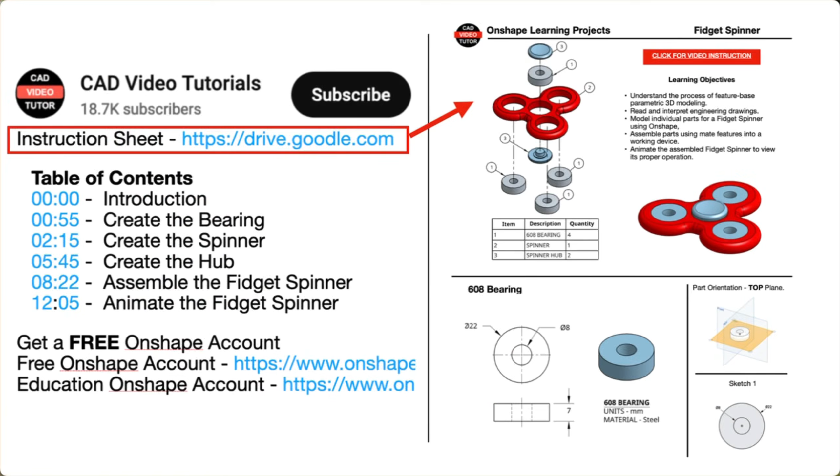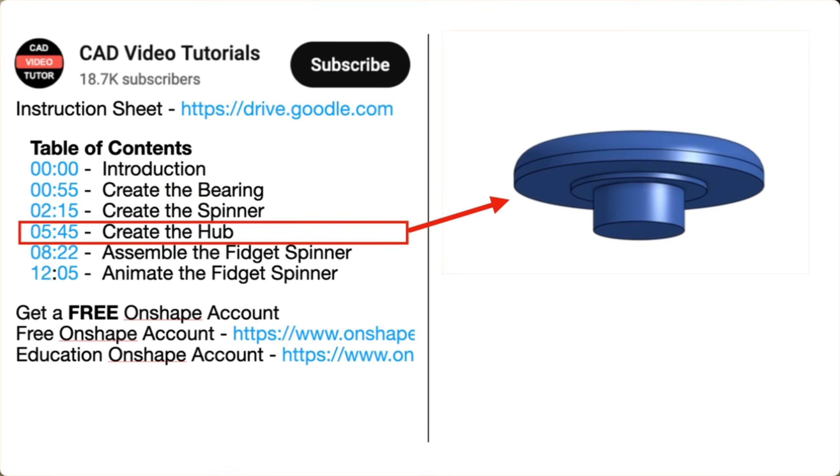The video instruction is organized into 5 segments. In segment 1, you will create the bearing. In segment 2, you will create the spinner. In segment 3, you will create the hub. In segment 4, you will assemble your fidget spinner using mates. In segment 5, you will animate your spinner to view its operation. So, now you are ready to begin the project.

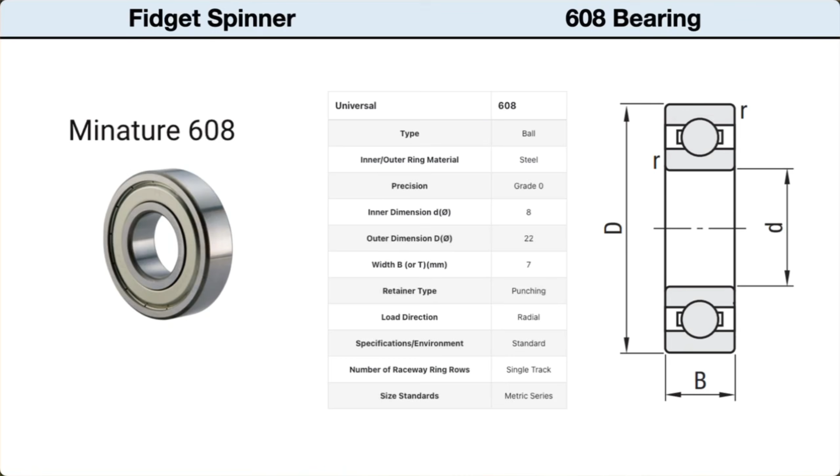In this first segment, we'll create the bearing. The 608 ball bearing is a commonly manufactured part used for skateboard wheels and fidget spinners. If you were to 3D print your spinner, this bearing is probably what you would use to make it spin. For our model, we only need to create a simple placeholder part that has the same dimensions as the actual bearing to use in our assembly.

Let's look at the engineering drawing of the bearing. First, there is an isometric view to help us visualize the part in 3D. There are also 2 orthographic views. These are displayed as flat drawings and used to communicate the shape and size information. In the lower left corner is the front orthographic view. Aligned above the front view is the top view.

To create the model of the part, we need to identify its basic shapes. The top view shows the part is circular. The front view shows that it has a flat, uniform thickness. The top view shows a circular hole through the center. The front view shows that this hole goes all the way through the part.

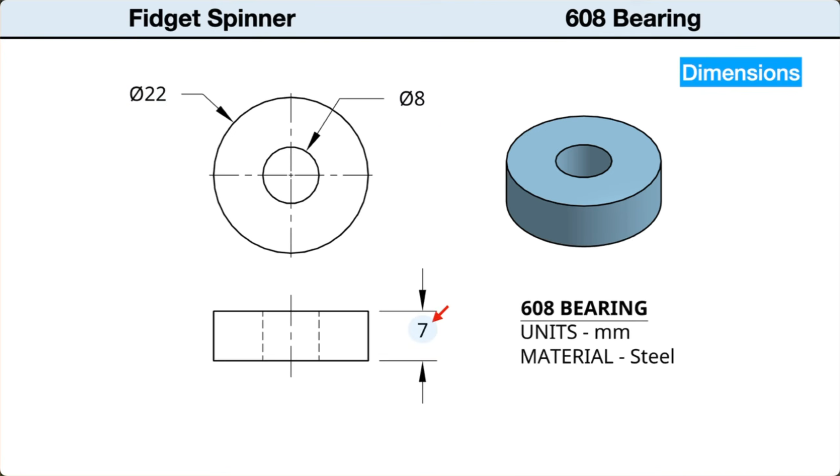Next, let's read the size dimensions. The outside diameter is 22 millimeters. The hole has a diameter of 8 millimeters. The thickness is 7 millimeters. I've started a new Onshape document and named it Fidget Spinner. First, let's check the document's workspace units. I want to make sure that length is set to millimeters and mass is set to grams. Use the green check to close.

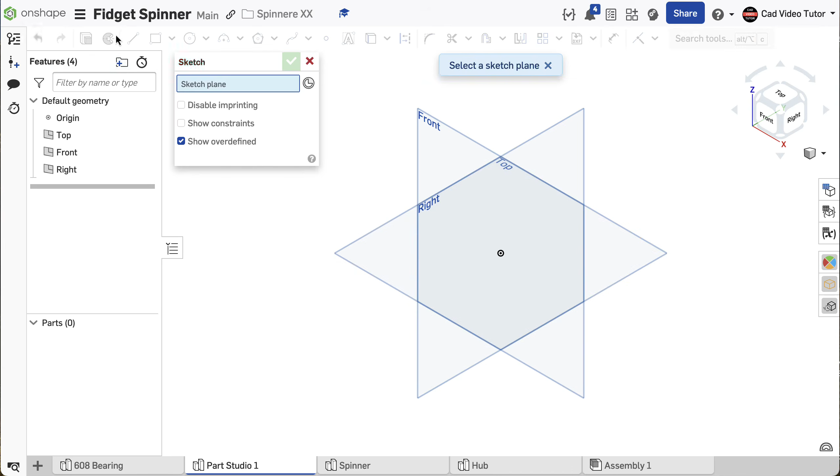Start a new sketch by clicking on the button in the toolbar. Click on the top sketch plane to choose it. Right-click and choose View Normal to the sketch plane. Use P on the keyboard to turn off the visibility of the sketch planes. From the toolbar, choose Center Point Circle. Click coincident to the origin to set the center and then click again to create the circle. From the keyboard, enter 22 millimeters for the diameter.

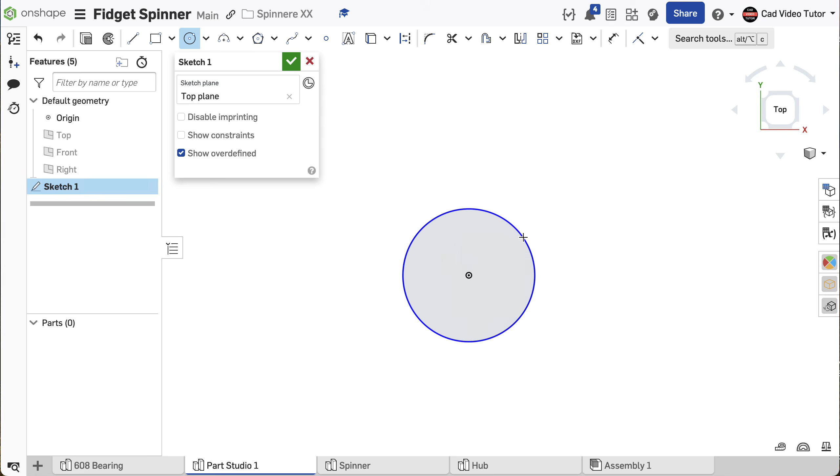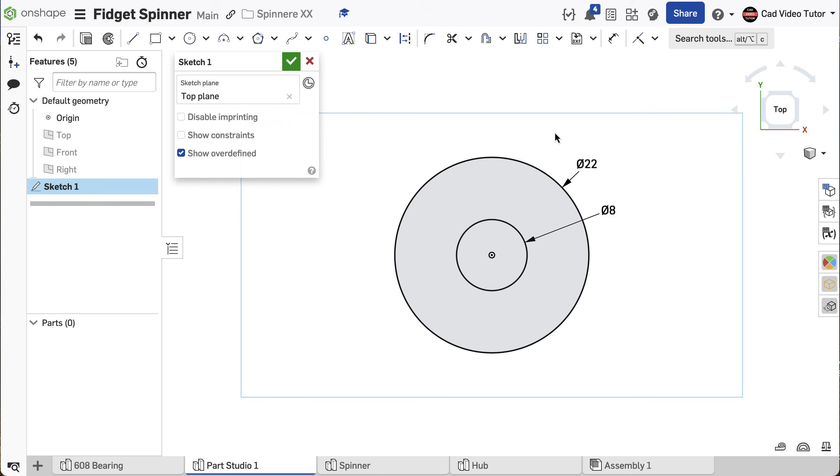Click again on the origin to create the inner hole. Set the diameter at 8 millimeters. Right-click the mouse and choose Escape Circle to end the command. The sketch is complete, so use the green check to accept the sketch. Right-click again and choose Isometric View from the menu.

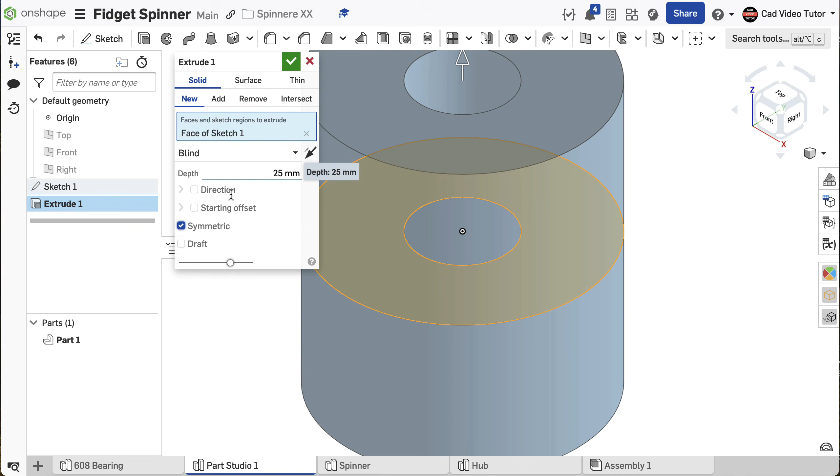Next, from the Feature toolbar, choose the Extrude tool. This will be new. For the region, choose the sketch. Use the checkbox to extrude symmetric. Set the depth to 7 millimeters. The part will be centered and extend equally above and below the top sketch plane. This looks correct, so use the green check to accept.

We have now created the bearing. Looking in the feature list, you can see that Sketch 1 and Extrude 1 are listed. If you need to edit either feature, you can double-click to open it again and make changes.

In this segment, we'll create the spinner. Let's start by reading the engineering drawings. First, the drawings show an isometric view. This helps us visualize the part in 3 dimensions. 2 orthographic views are also provided. In the lower left corner is a front view, and aligned above the front view is a top view.

To help in making the model, we need to identify the shapes and features that make up the part. The spinner contains a number of circular features, all concentric to a common center point. At the center is a solid circular shape. Evenly spaced around the outside are 3 equally sized circles.

At the center, there's a circular hole, and the front view shows that it extends through the part. There are 3 additional holes, each located at the center of each of the outside circles, and these holes extend through the part. The front view shows a uniform thickness with rounded outside edges.

Next, let's read the dimensions. The central hub has a radius of 19 millimeters. This makes the diameter 38 millimeters. The three outer circles have the same diameter of 38 millimeters. The centers of all of the outside circles are coincident to the circle center with a diameter of 50 millimeters.

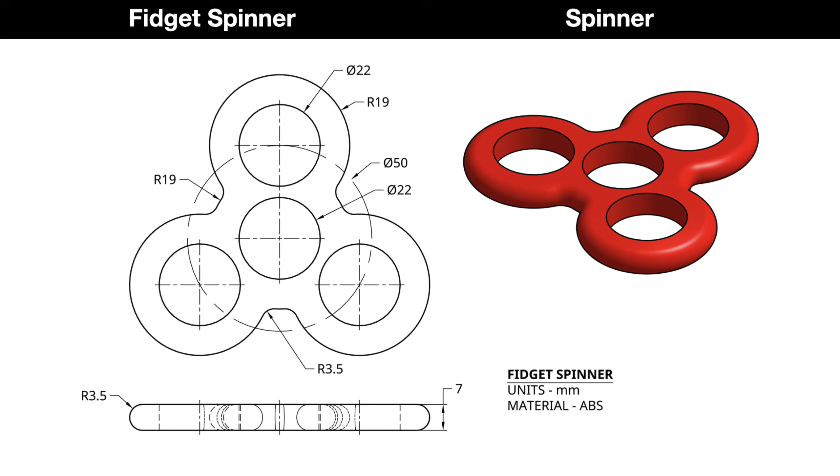I've opened my Onshape document named Fidget Spinner. I can see that this document already contains a part studio with the bearing. To create the spinner, we are going to need a new part studio. Click on the plus in the lower left corner and choose Create Part Studio. We have now created and opened a new empty part studio for our spinner.

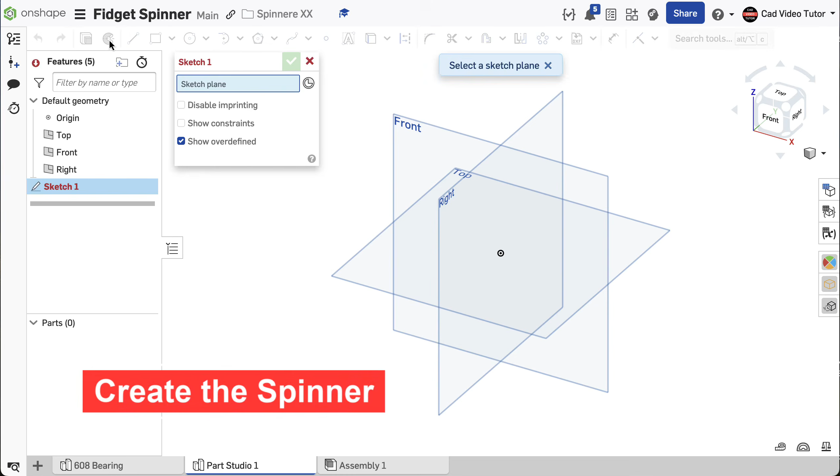Start by clicking on the Sketch button on the toolbar. Click on the top sketch plane to choose it. Right-click and choose View Normal to the sketch plane. And use P on the keyboard to turn off the planes. I know from the drawings that the center has two circles, with the smaller one to fit the bearing.

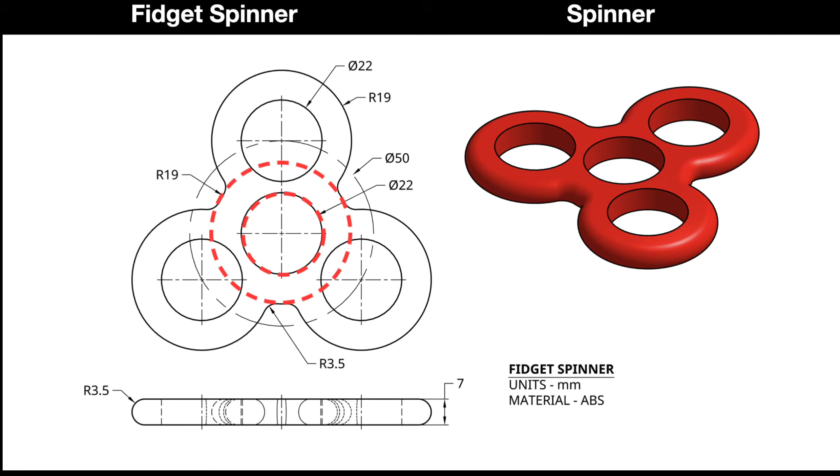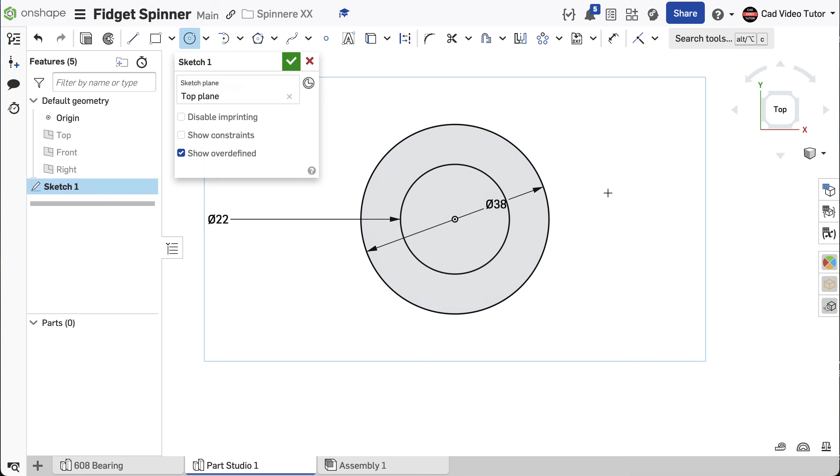Choose Center Point Circle from the sketch tools and click on the origin for the center of the circle. Click again and then set the diameter to 22 millimeters. Next, again click on the origin for the center of the larger circle and click to create a circle outside the smaller one. Enter 38 for the diameter. Right-click and choose End Circle.

To create one instance of my outer circles, I'm going to use a construction line to locate their center point. Click on the Line tool and then the Construction tool in the toolbar. Click on the origin to start the line and pull it vertical above the existing circles and double-click to end the line. Enter the length as 25 millimeters. We can now draw the outer circles using the end point of this line as the center.

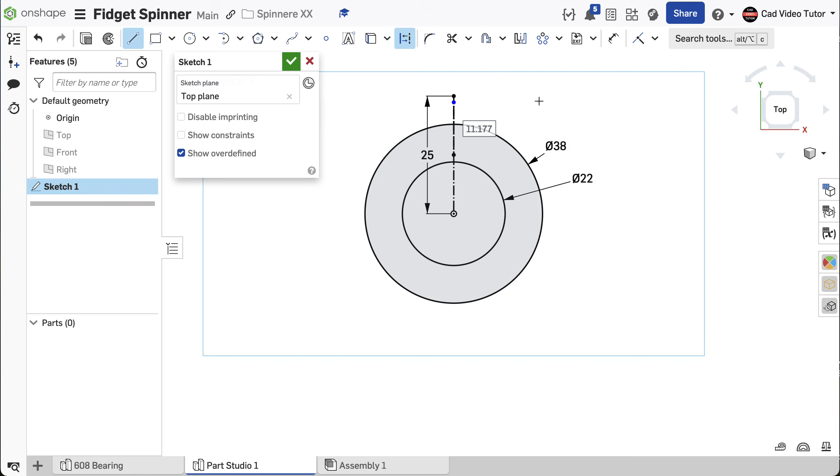Click on the Center Point Circle tool and click on the end of the line. Click again to make the first circle. Click on the end point again for the center of the larger circle. Click again and then right-click and end the circle tool. These two outer circles have the same diameters as the first circle, so we will use an equal constraint to set their size. From the constraint tools, choose Equal.

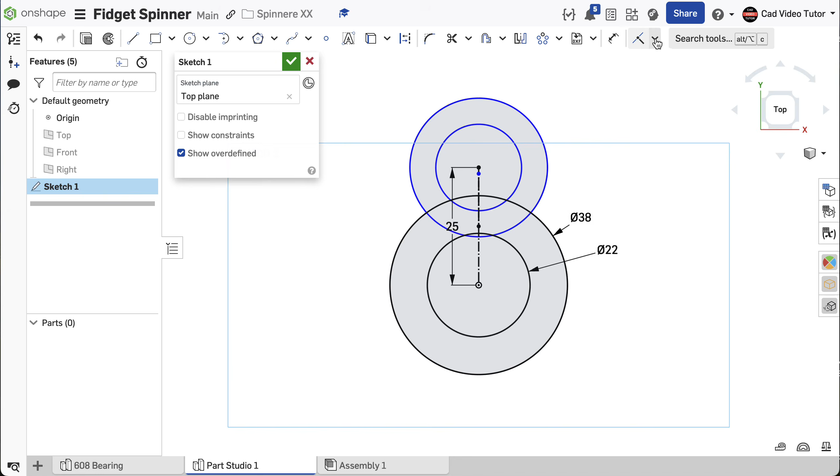Click on the bearing circle and then click on the circle above it to make it the same size. Click on the larger circle at the center and then the larger circle above. They should all turn black, showing that they're fully constrained. And now if I were to change the diameter of either center circles, these outer circles will change with them.

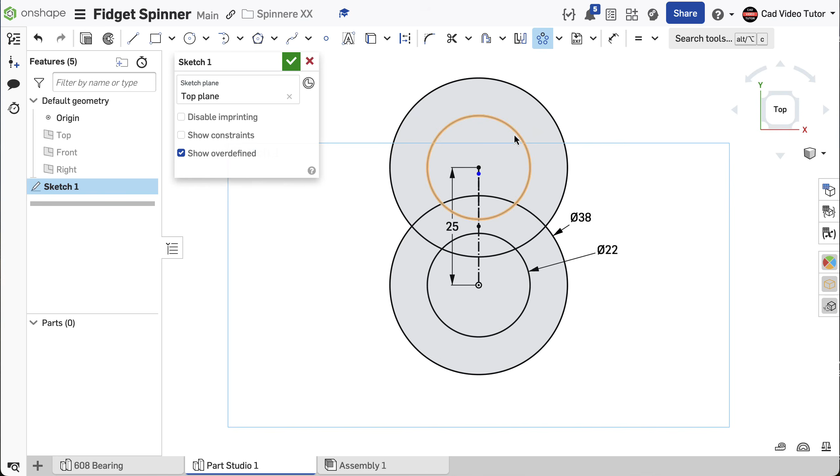The drawing shows that there are 3 instances of these outer circles. To create the additional circles, we're going to use a Circular Pattern tool. Choose Circular Pattern from the toolbar. Click on the outer circles to repeat them. You can see the instances automatically created and evenly spaced about the center point. There are 3 instances. You could edit this to create more.

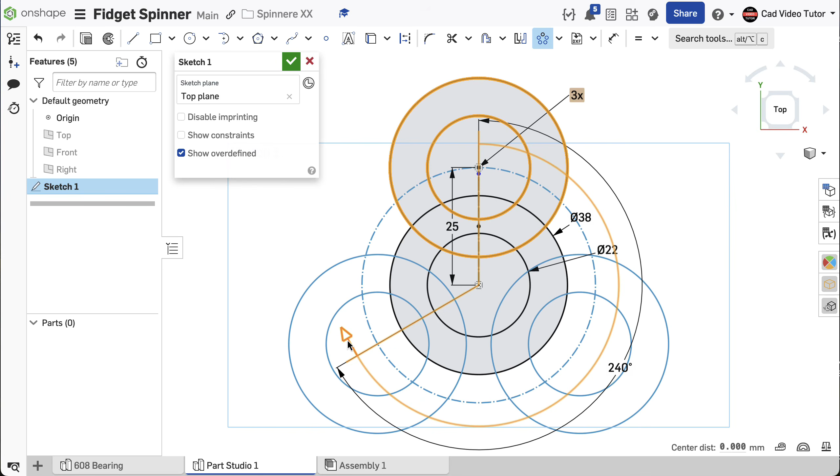240 degrees is the included angle. This means there are 120 degrees between each instance of the pattern. This could also be changed by dragging the arrow. I want to keep the even spacing. Click the left mouse button to accept the pattern and end the command.

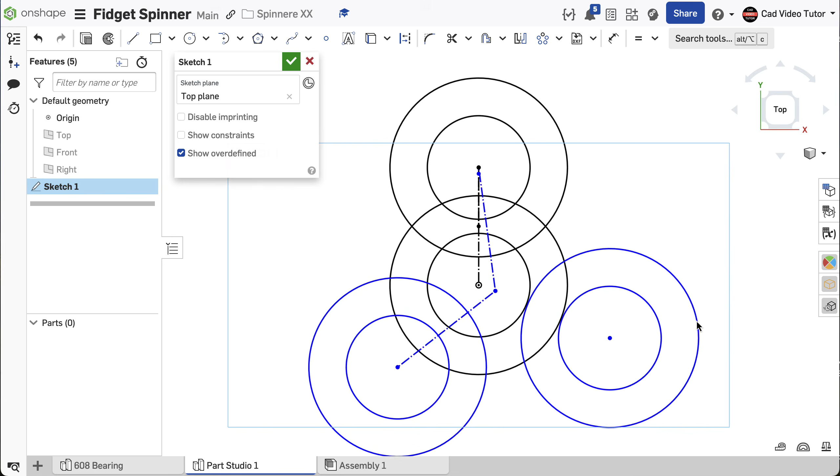Looking at the new circles in the pattern, I can see that they are blue, indicating that they are not fully constrained. With the mouse, click on a blue circle and drag to determine its degrees of freedom. Notice that the center of the pattern moves and is not constrained. Choose Coincident from the constraint tools.

Click on the pattern center and then the origin. All of the entities should now be black and fully constrained. The sketch is complete. Use the green check to accept. Right-click and choose Isometric View.

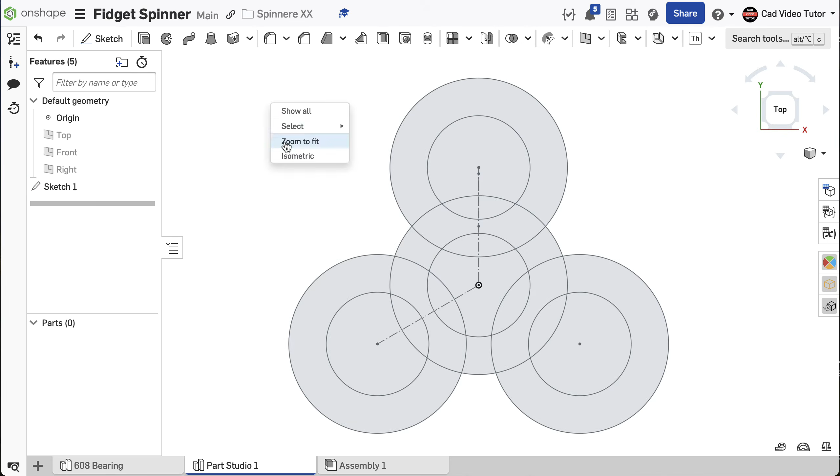Choose Extrude from the Feature toolbar. This will be a new part. Set the depth of the extrusion to 7 millimeters. Check the box for Symmetric to extrude equally above and below the top plane.

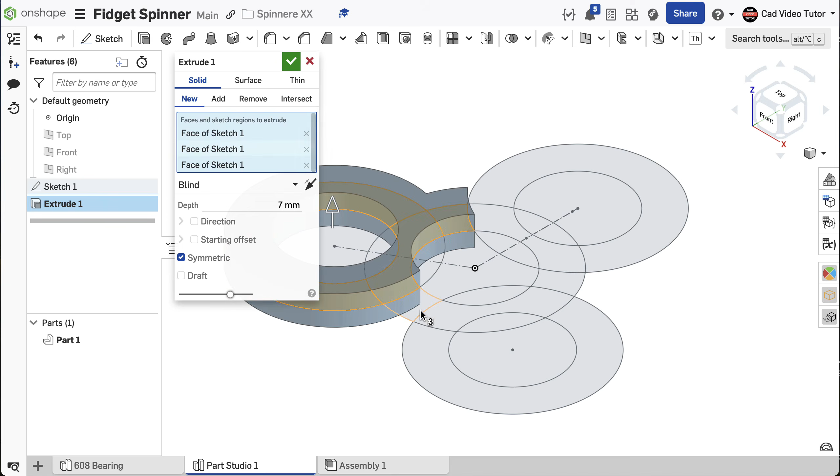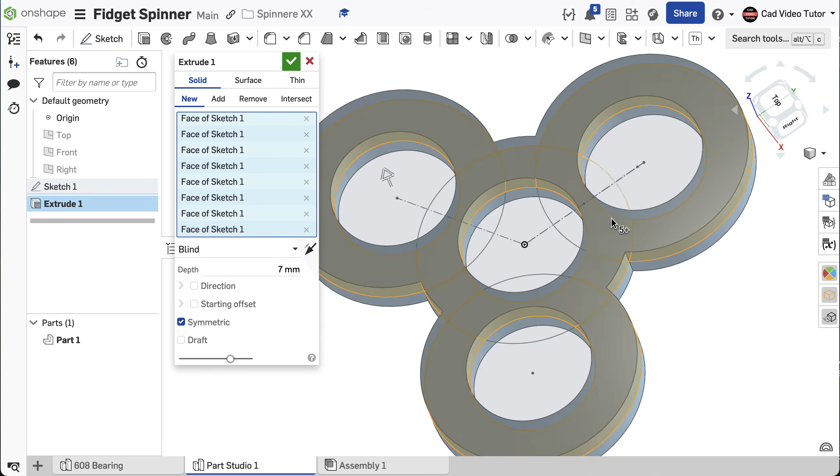Click on the regions of the sketch that will be included in the spinner. If you click on a region that you don't want, click on it again to remove it from the selection. Use the green check to accept.

Next, we're going to round over the top and bottom outside edges. Click on the fillet tool in the toolbar. Set the radius to 3.5 millimeters.

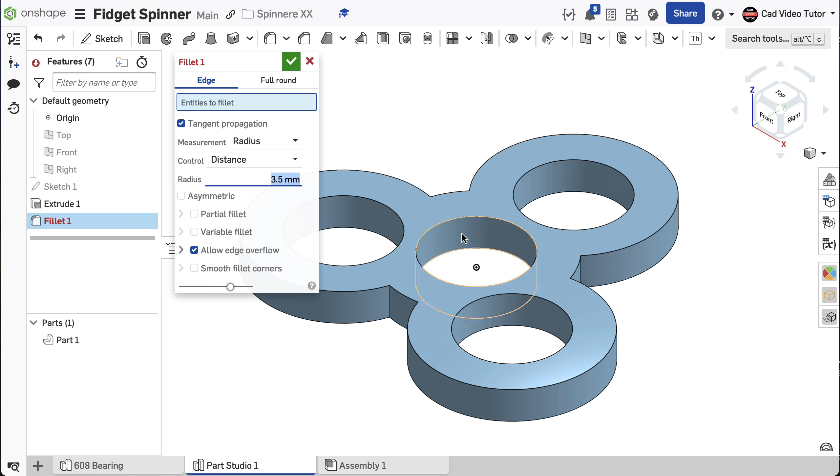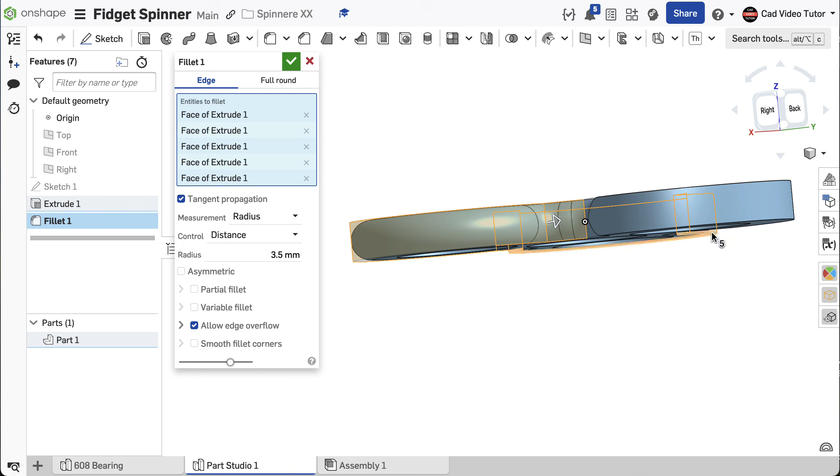Start by clicking on the small faces between the larger outer circles. Next, click on the outside faces of the larger circles. This should result in all of the outside edges being rounded. Use the green check to accept, right-click and go to isometric.

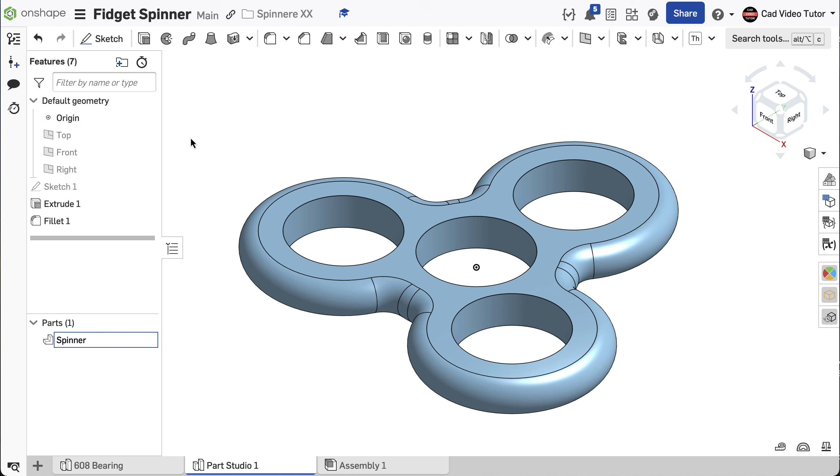We have now completed the spinner. In the parts list, right-click on Part 1 and choose Rename, enter Spinner. In the Part Studio tab, right-click and choose Rename the tab, enter Spinner.

Also, we will change the appearance of the part. Right-click on the spinner in the parts list and choose Edit Appearance. Choose red for its color. Use the green check to accept.

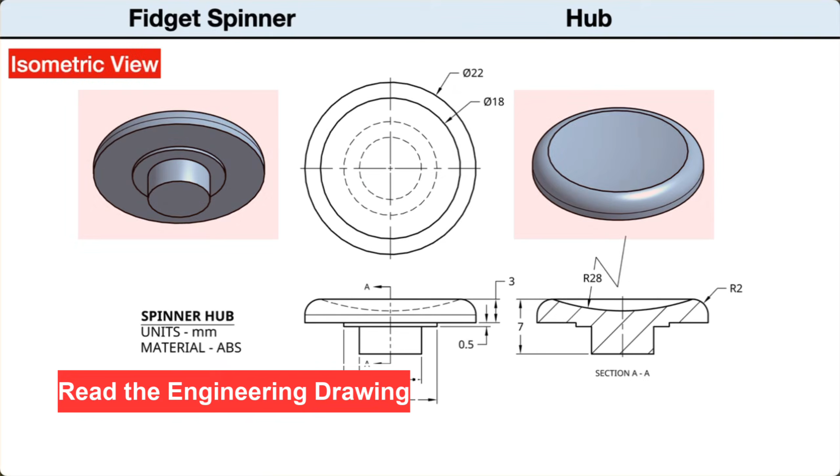In this segment, we'll create the hub. Let's start by reading the engineering drawings. First, there are two isometric views provided to help visualize the part in 3D. Also, there are three orthographic views.

In the lower left corner is a front view. Projected directly above the front view is a top view. Projected to the right of the front view is a right side view, shown here as a half-section view of the hub. Before modeling the part, let's identify the basic shapes.

The hub is circular and symmetrical. All of the features are concentric to the center. It has a circular shaft that extends below and fits into the center hole of the bearing in the assembled fidget spinner. There's a thin shoulder or standoff that will provide a clearance between the hub and the spinner.

The top cap of the hub is also circular and concentric to the center. The top surface of the hub has a circular recess that is also concentric to the center. The top outside edge is rounded with a fillet.

Next, we'll review the dimensions. The diameter of the shaft is 8 millimeters. The diameter of the standoff is 12 millimeters. The thickness of the standoff is 0.5 millimeters.

The outside diameter of the cap is 22 millimeters. The thickness of the cap is 3 millimeters. The total height of the hub, including the cap and the shaft, is 7 millimeters.

The center recess has a diameter of 18 millimeters. The arc that forms the recess in the center has a radius of 28 millimeters. The rounded top edge has a radius of 2 millimeters.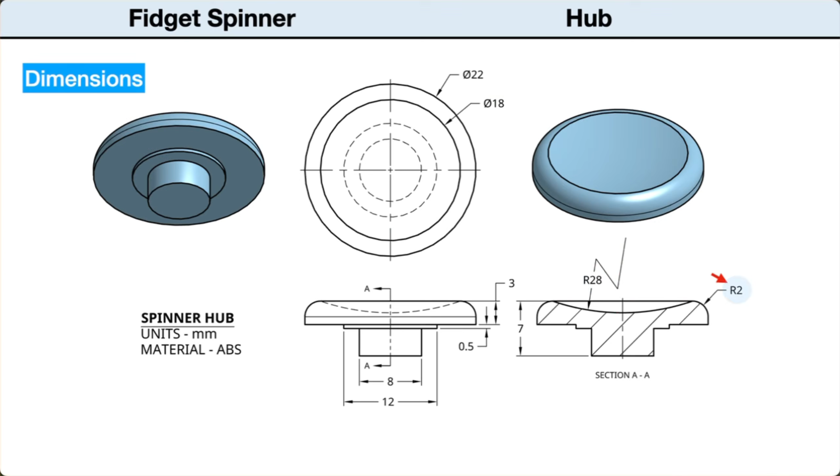In this segment, we're going to create the hub for our fidget spinner. To begin, let's review the steps we will use to create all of the features.

We'll start with a sketch that includes the diameter of the shaft and the standoff. Using the extrude tool, we will create the shaft and the standoff. Next, we will use a sketch to create half of the profile needed for the cap portion of the hub. Then, using a revolve tool, we will create the cap.

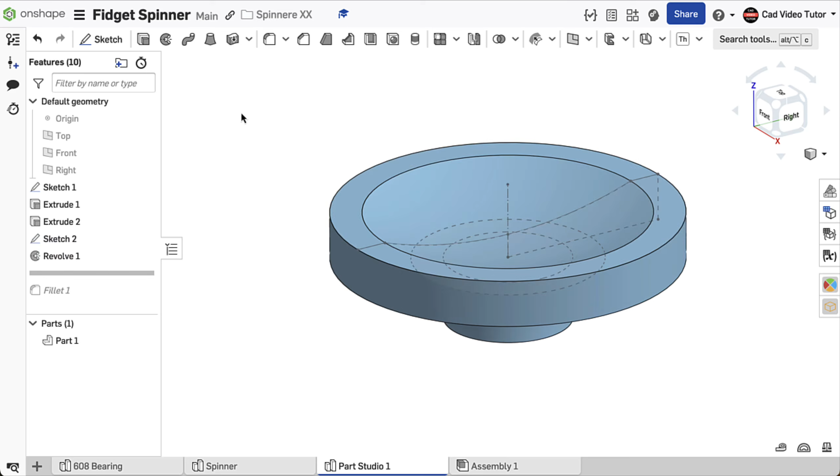Lastly, add a fillet to round over the top outside edge. I've opened up my Onshape document named Fidget Spinner. This document already contains part studios with the bearing and the spinner. For the hub, we will create a new part studio.

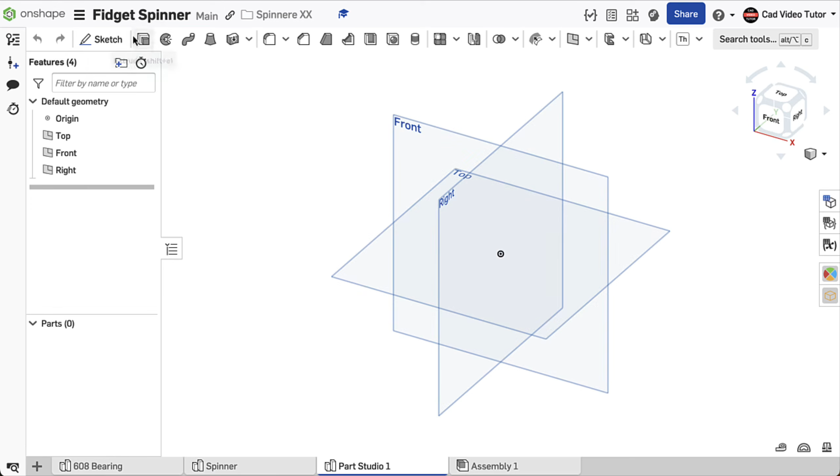Click the Sketch button on the toolbar. Click on the top plane to select it. Use N on the keyboard to view normal to the sketch plane. Use P on the keyboard to turn off the visibility of the sketch planes. Click on the center point circle from the toolbar.

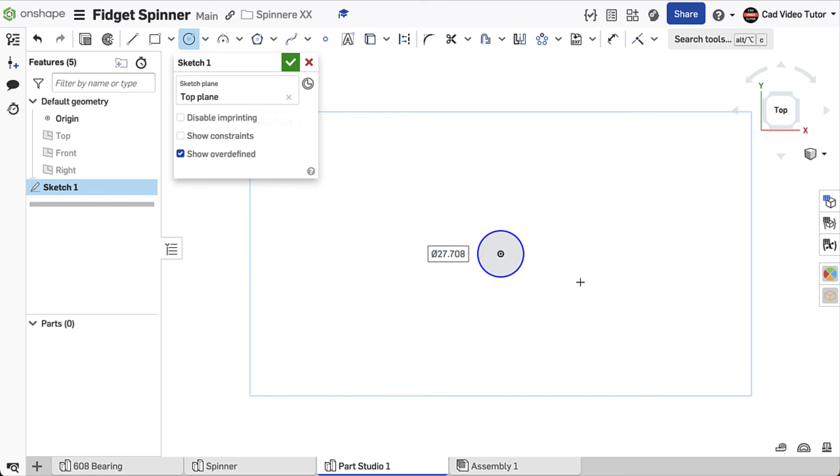Click Coincident to the origin and create an 8 mm circle for the shaft. Click Coincident to the origin again and create a 12 mm circle for the standoff. Use Escape on the keyboard to end the circle. Use the green check to accept the sketch.

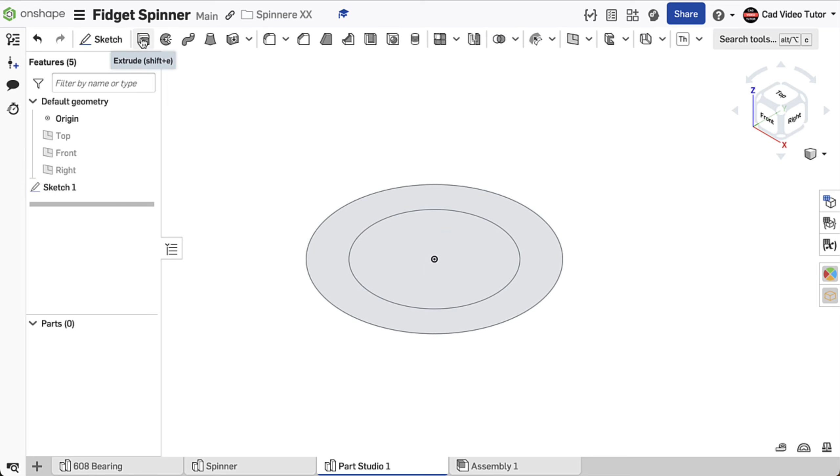Right-click and choose Isometric View. Click on the Extrude tool from the Feature toolbar. Click on the inner circle to create the shaft. This has a total depth of 4 millimeters.

And it should extend down below the sketch plane. Use the green check to accept. Now we're going to add the standoff.

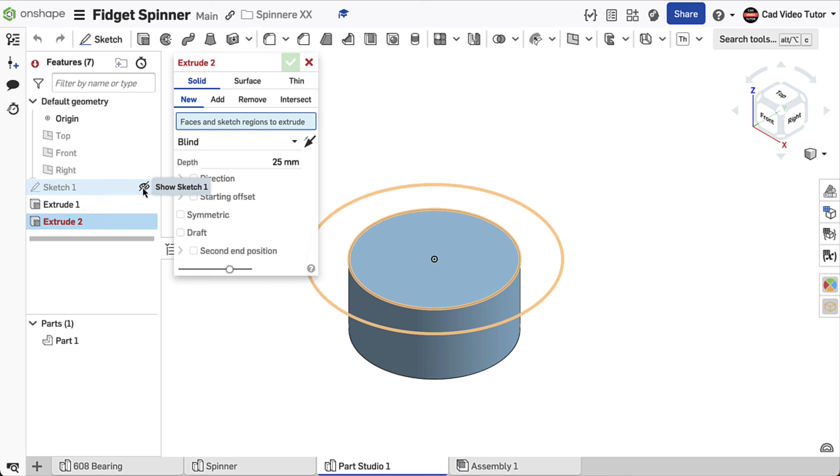Click on the Extrude tool again. Click on Sketch 1 in the feature list to turn on its visibility. Set the depth at 0.5 millimeters, and click on the center circle and on the outside circle. Click the arrow to change the direction to extend below the sketch plane. Use the green check to accept.

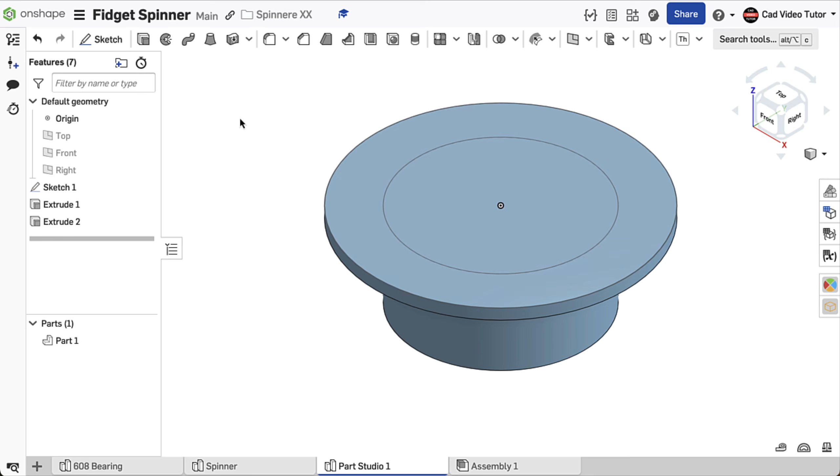These features represent the bottom portion of the hub. We need to add the round upper portion that will be the cap with a recessed center. Use the Sketch button on the toolbar and from the feature list click on the front sketch plane.

Use N on the keyboard to view normal to the sketch plane. We are going to sketch half of the profile that makes the cap. Click on the Line tool and click on the origin. Pull a horizontal line out beyond the standoff and click. Make a vertical line going up representing the thickness, and a horizontal line extending in towards the center. Use Escape on the keyboard to end the Line tool.

We will need a center line, so I'm going to click on the Line tool and then the Construction tool. Snap a line coincident to the origin and draw a vertical line. Double-click to end the line.

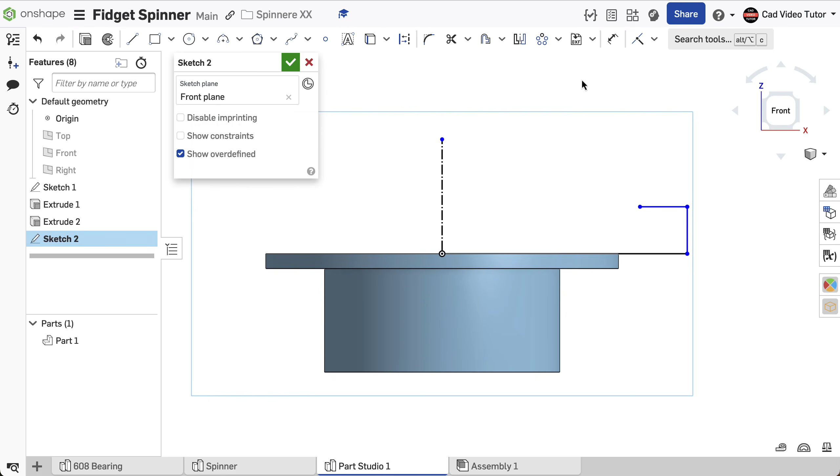Next, we will add dimensions. Click on the Dimension tool from the toolbar. To dimension the outside diameter of the cap, click on the outside vertical line. Then click on the center line and move the cursor past the center. This should allow us to enter the diameter value of 22 millimeters.

Dimension the height of the cap at 3 millimeters. Dimension the top line at 2 millimeters.

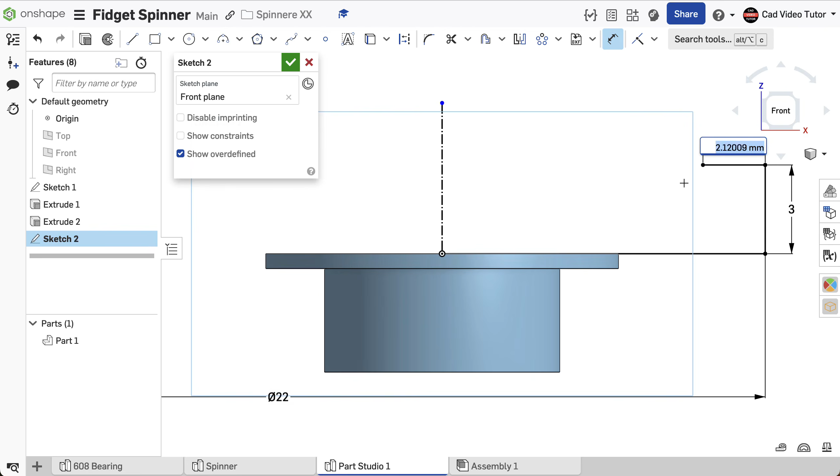The recess is formed by an arc projected across the center of the cap. To make the arc, we need to define both endpoints. We will use a mirror tool to mirror this top line to the other side.

Click on the mirror tool in the toolbar and then click on the center line to use as the mirror line. Click on the top horizontal line and we can see it mirrored on the other side. Right-click Escape Mirror.

Click on the 3-point arc from the toolbar. Click on the end of the line to start the arc. Click on the line on the other side and then pull the arc down and click. Set the radius to 28 millimeters.

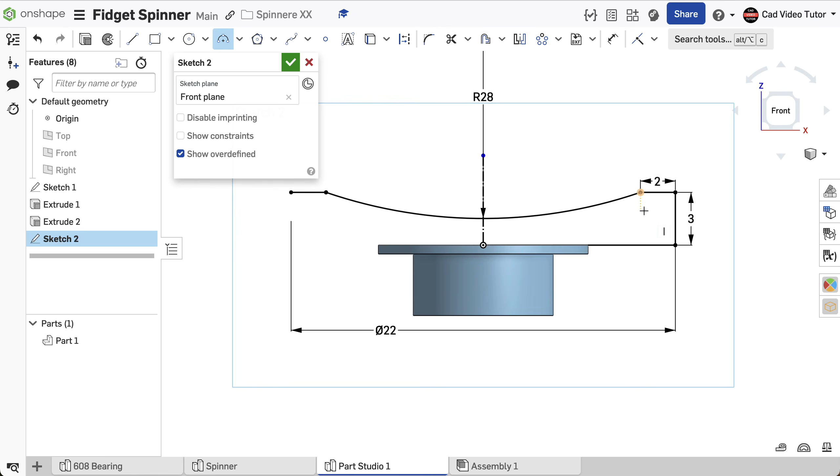We need to close the region to create the profile that we can use for the revolve. Click on the Line tool and click on the origin to start the line. Draw a vertical line and click coincident to the center of the arc. Use Escape to end the Line tool.

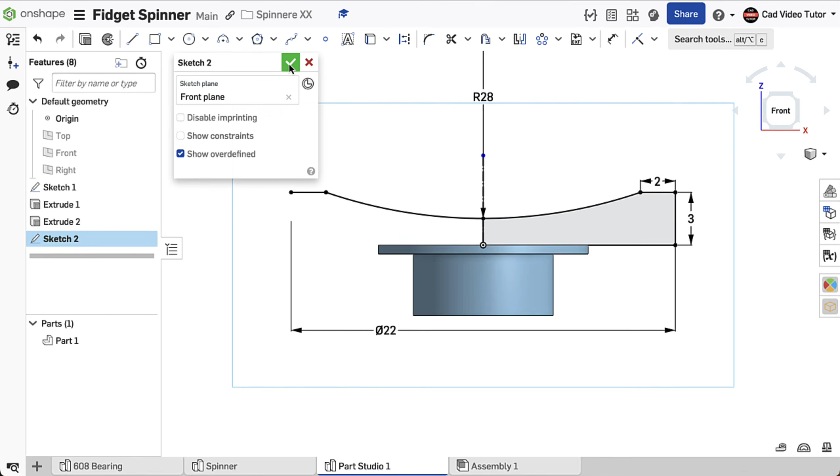The region should now be gray and all the lines should be black as they are fully constrained. And now we've created half of the cap and a profile that we can use to revolve the feature. Use the green check to accept the sketch. Right-click and choose Isometric View.

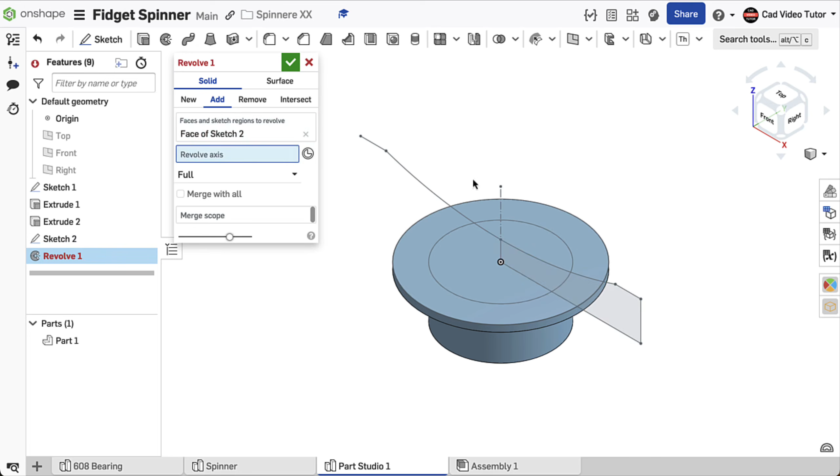Click on the Revolve tool in the Feature toolbar. We will add to our existing part. Use the region in the sketch. Click on the center line to use as the revolve axis. This revolves that profile around the center and adds the feature.

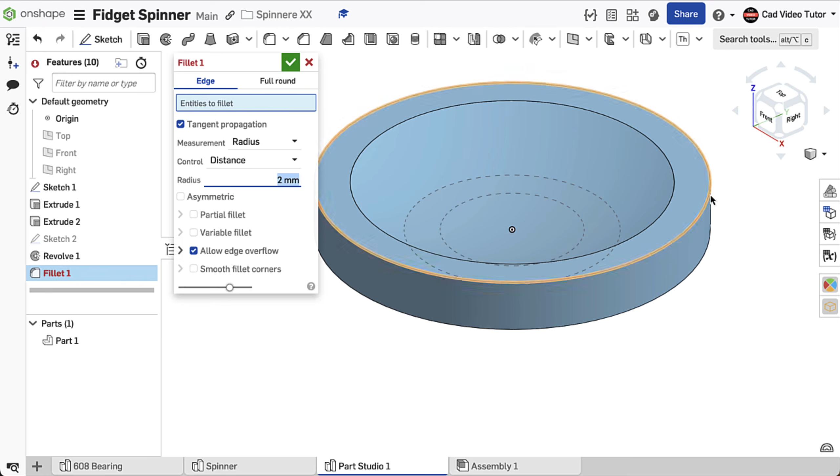Lastly, we're going to round the outside corner. Click on the Fillet tool in the Feature toolbar. Set the radius to 2 millimeters. Click on this top outside edge to create the fillet. Use the green check to accept.

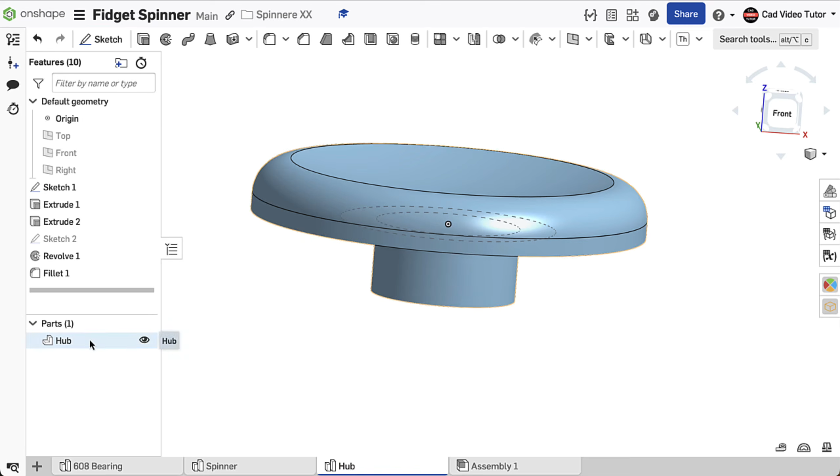Lastly, we'll change a few properties for this part. In the parts list, right-click on Part 1 and choose Rename. Name it Hub. And we'll do the same down here for the Part Studio tab. I'm going to rename and also call this Hub. To change the color of the hub, right-click on the hub in the parts list, choose Edit Appearance.

Choose Blue, use the green check to close. This creates our final part, and we can now move on to assembling our fidget spinner.

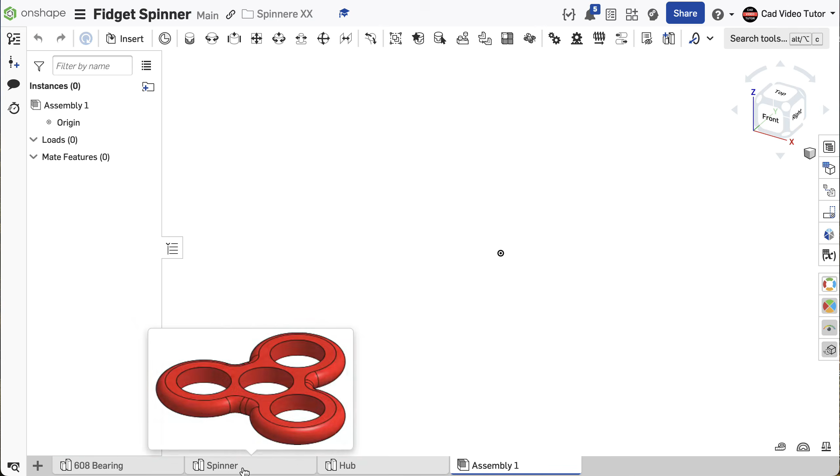In this segment, we'll assemble the fidget spinner in Onshape using assembly mates. I've opened my Onshape document called Fidget Spinner. It contains all the project parts, each in their own part studio: the bearing, the spinner, and the hub.

On the tab bar, I should have a blank Assembly Studio tab. Click on the tab to open the Assembly Studio. If you don't have one, use the plus in the lower left corner and choose Create Assembly from the pop-up menu. Notice that the toolbar now starts with an Insert button for placing parts in the assembly window.

The toolbar also contains a variety of tools for mating parts and controlling their movement. Start by clicking the Insert button. In the insertion box, you can see the parts available in our current document. Each Part Studio tab is listed.

There is an expansion arrow to the left. If you click the arrow, it shows all of the parts available in that Part Studio. In our document, we have just one part in each Part Studio. Click on the bearing to insert it.

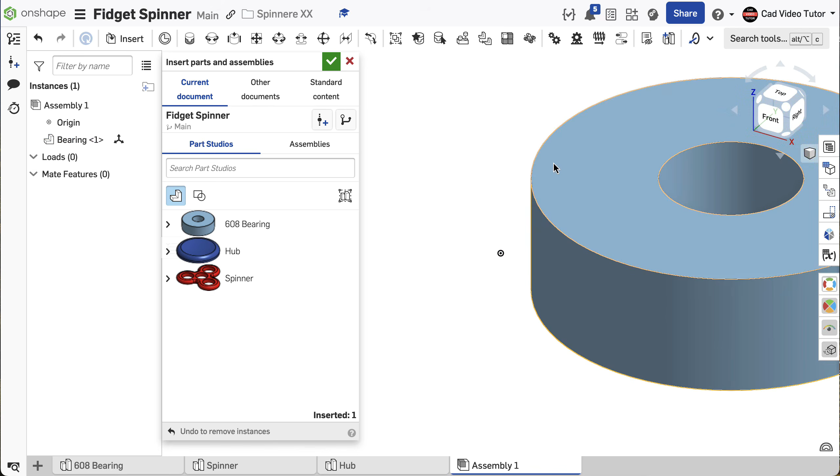It shows up in the assembly window, but notice its color is yellow. This indicates that I can now use the mouse to drag it to a preferred location. Then left-click the mouse to place the part in the assembly window. The yellow color turns off when it is placed. Use the green check to accept.

With no mates applied, the bearing still has all its degrees of freedom. If you left-click on the part and hold the mouse button down, you can still drag it around the window.

Usually the first part that's placed into the assembly will be fixed so that it won't move. To fix the bearing in the assembly area, right-click the mouse and choose Fix from the pop-up menu. Now, if I click and try to drag, you will see a fix icon show up on the bearing.

If you look at the bearing in the instance list, it shows a fix icon. If you need to move the bearing now, you have to right-click on the part and choose Unfix from the menu. Usually, there's only one part in your assembly that's fixed.

This is considered to be the base part and is used as a stationary anchor, and other parts are mated to it. Next, notice that the only default geometry available in the assembly window is the origin. This represents the zero point or center point of the assembly area. Usually, when inserting the base part, we want to maintain the original alignment of the part with the origin.

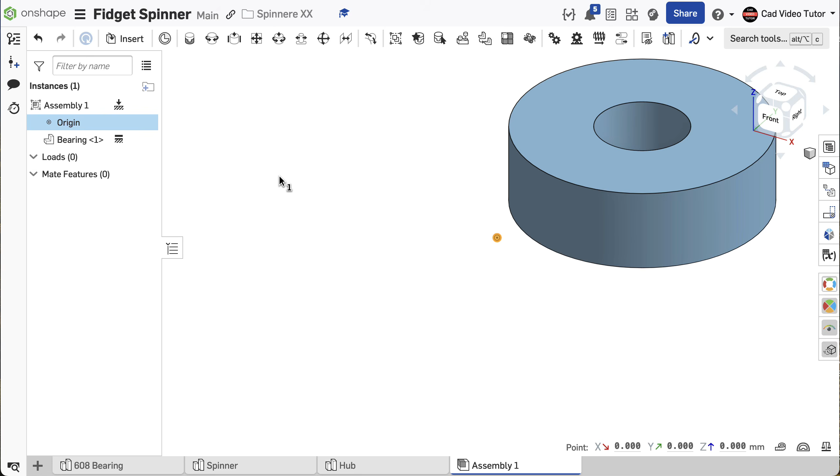To do this, let's start over and insert the bearing again. Click on the bearing to select it and use the Delete key on the keyboard. Click on the Insert button to insert it again. Click on the bearing to insert it.

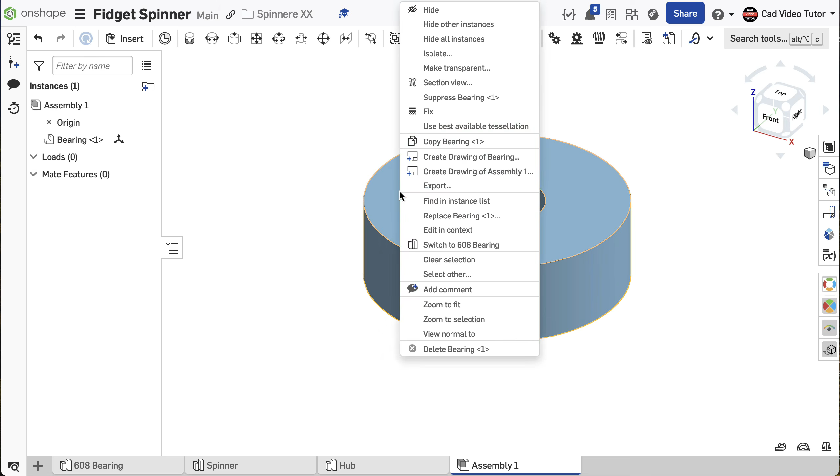Now, without dragging the bearing around in the assembly window, use the green check to accept. Right-click on the part and choose Fix without moving it. Notice the orientation of the bearing to the origin is the same as it was in its part studio. It's centered on the origin. We have aligned our base part with the origin and fixed it in the assembly window.

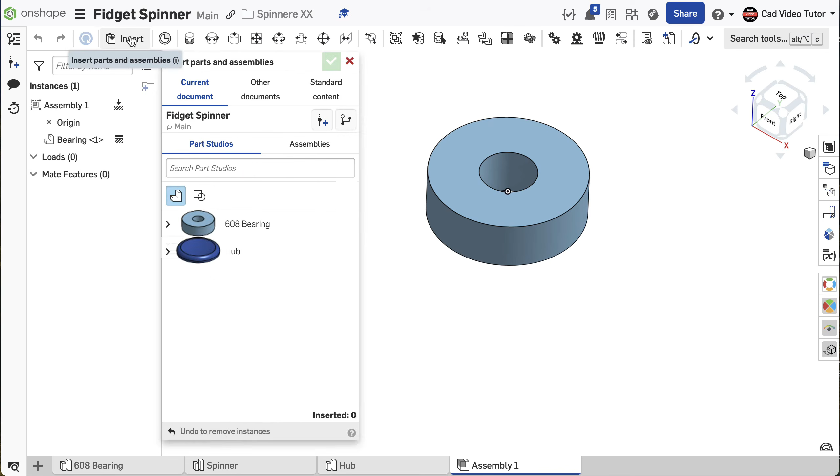Next, we will insert the spinner into the assembly and mate it to the bearing. Click the Insert button on the assembly toolbar. Click on the spinner and then choose the green check to accept. It looks like the spinner has been placed where we want it, but there is no mate applied.

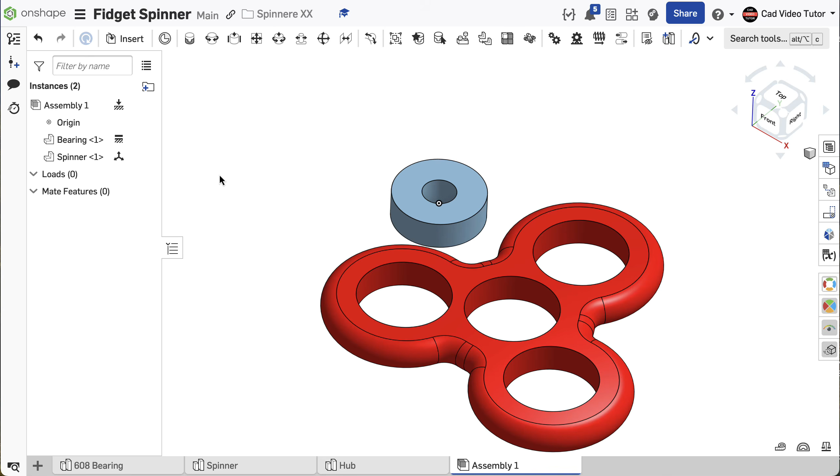So it is still free to move. Use the mouse to drag the spinner, and it still has all degrees of freedom. In order to fix the spinner to the bearing, we need to apply a mate. But in this case, we also want the spinner to be able to rotate. We can accomplish this by using a revolute mate.

Click on Revolute Mate from the Assembly toolbar. Next, I have to choose two mate connectors to align the parts. If you hover your mouse over the bearing hole in the spinner, you'll notice that a variety of mate connectors will light up. This means they are available to choose.

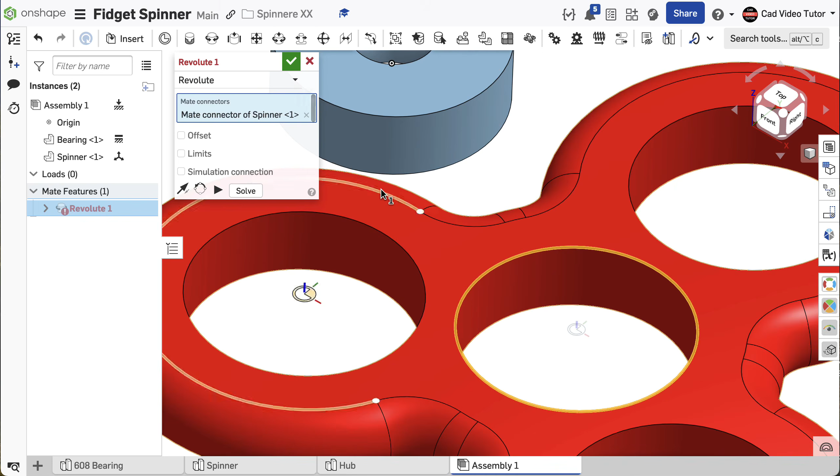I want to choose the connector that is centered on the top of the spinner bearing hole. Click to choose it. Notice in the Mate dialog box, the selection has been added. Next, hover the mouse over the bearing and look for the mate connector centered on the top of the bearing. When it lights up, click the mouse to select it. The two mate connectors will snap together.

At the bottom of the dialog box are some tools to help troubleshoot the assembly. The arrow will reverse the Z-axis orientation of the mate.

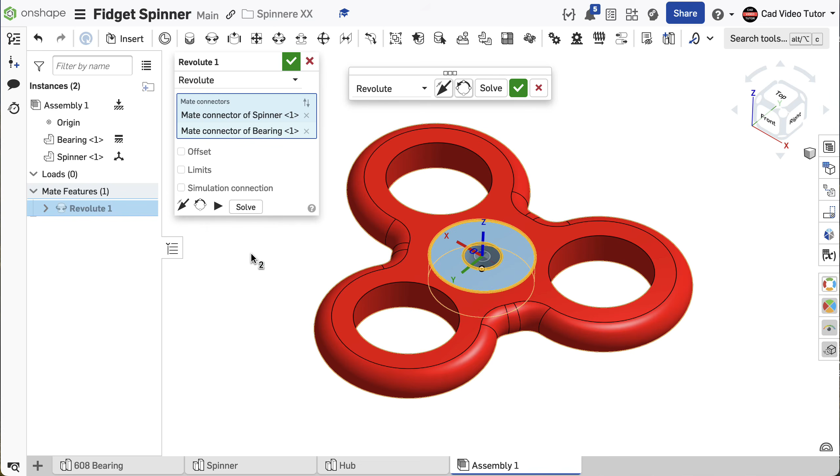The circle will rotate the X-axis and turn the part about the center. The play arrow will preview how the parts will move with this mate applied. The solve button will reapply other mates to solve any conflict with previously applied mates. This mate looks correct, so use the green check to apply.

Next, we will insert the hubs. The assembly will require 2 of these parts. Click on the Insert button from the toolbar. Click on the hub and place it in the assembly window. Click on the hub again and place a second hub in the assembly window. Use the green check to accept.

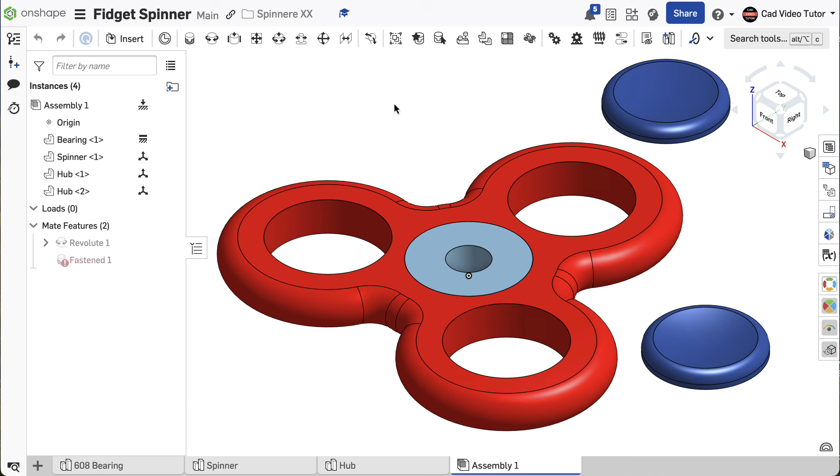When the hub is mated to the bearing, it will not need to move, so we will use a Fasten mate. Click on the Fasten mate in the toolbar. First, hover on the top surface of the bearing and click to choose the mate connector centered on the hole. Next, go to the hub, rotate as needed to locate the mate connector where the shaft meets the standoff. Click to choose and the parts snap together.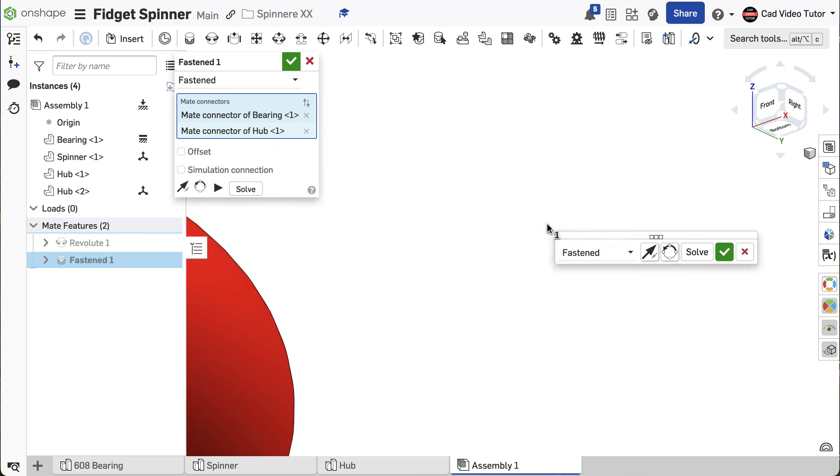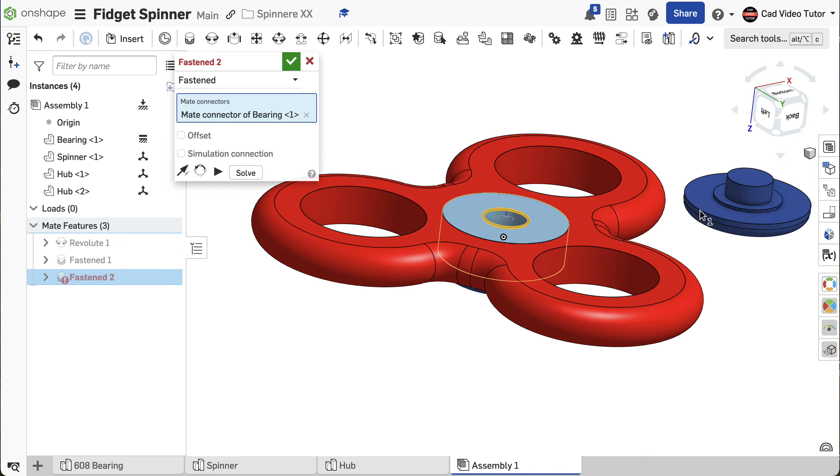To accept, use the green check in the floating toolbox. Using the floating toolbox keeps the mate tool active and we can apply another Fasten mate. Turn the part to view the bottom of the bearing. Hover on the bearing to light up the mate connector at the center of the hole. Click to choose it. On the second hub, hover to find the mate connector where the shaft meets the standoff. Click to choose the mate connector.

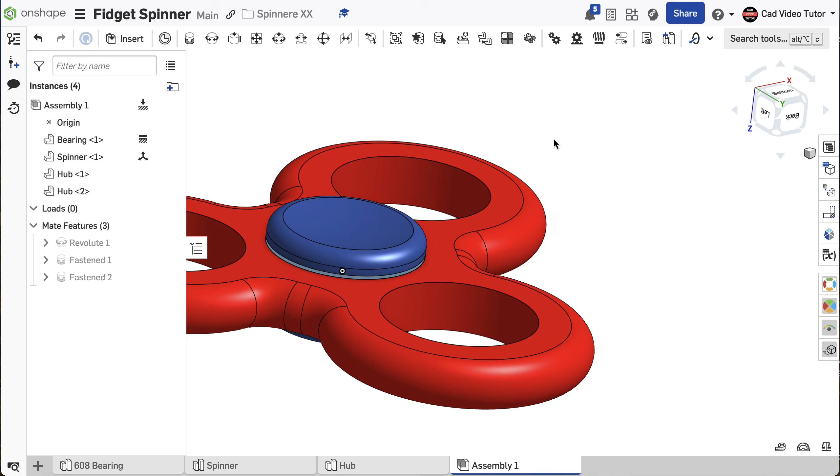The parts snap together, but the orientation of the hub is wrong. Use the arrow tool on the bottom of the dialog box to flip its primary axis. This looks correct. Click the green check on the dialog box to accept. Right-click and choose Isometric View from the menu.

Last, we need to insert 3 additional bearings and mate them to the holes in the spinner. Click on the Insert button. Place 3 bearings into the assembly window. Click on the Fasten mate from the toolbar. Use the top center mate connectors on the spinner and each bearing to mate them to the spinner.

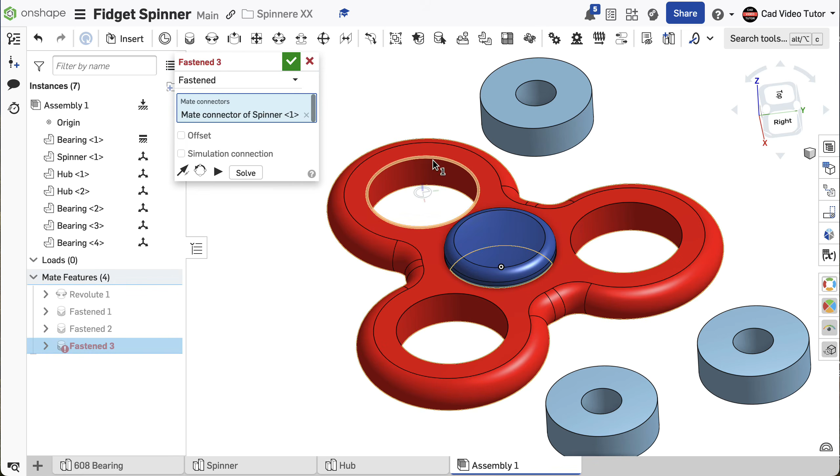The assembly is complete. On the left, examine the instance list. Notice an instance was created for each of the parts in the assembly. Below, all of the mates are listed in the order they were created. From the list, any of the parts or mate can be opened for editing.

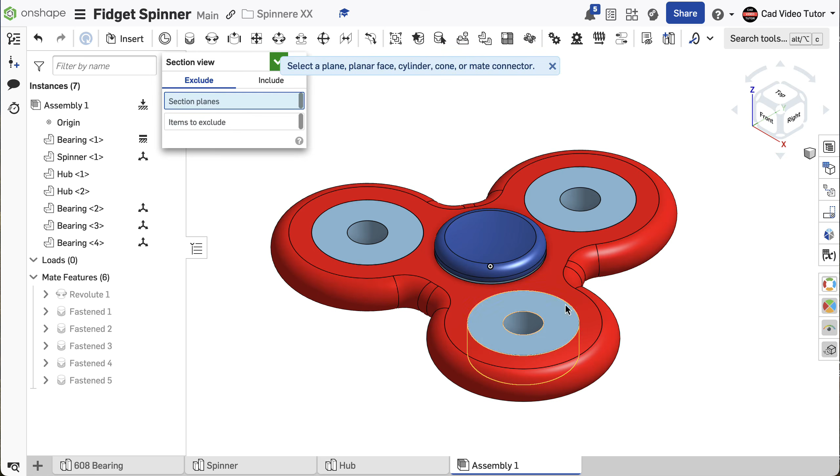If you want to examine the assembly, we can use a section view to look inside. Click on the Camera and Render option menu, and at the bottom choose Section View. Click on the hole in one of the bearings to set a vertical cutting plane. Drag the arrow to move the cutting plane and view a cut section of the assembly. We can see that the parts have assembled correctly without interference. Use the red X to close the section view.

Now that the fidget spinner assembly is complete, we can view its operation by applying animation. Look in the mate feature list and locate the revolute mate. This is the mate connecting the spinner to the bearing. We will animate this mate to see the device spin. Right-click on the revolute mate. From the menu, choose Animate.

In the dialog box, note the default settings for the animation. Start value is 0 degrees. End value is 360 degrees. Steps will determine the speed of the rotation, a larger number of steps going slower and smaller number increasing the speed. For the playback, we have 3 options: a single loop, reciprocate, loop.

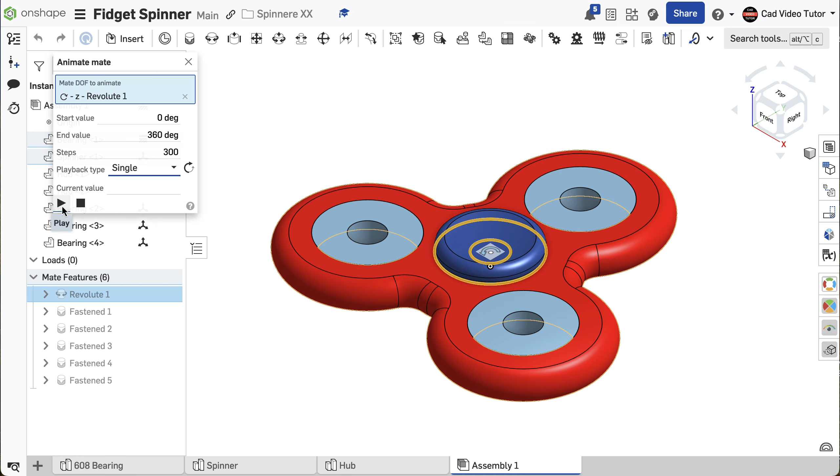Choose single. Click the play button and it rotates a single rotation. Click on the direction button and it will reverse the direction. Let's choose loop. Click play. It will continue until we use the stop button. Change the steps from 300 to 100. Click play.

Notice that you can zoom and rotate the assembly during animation. Right-click and choose Make Transparent to examine the relationships of the parts during rotation. Stop the animation.